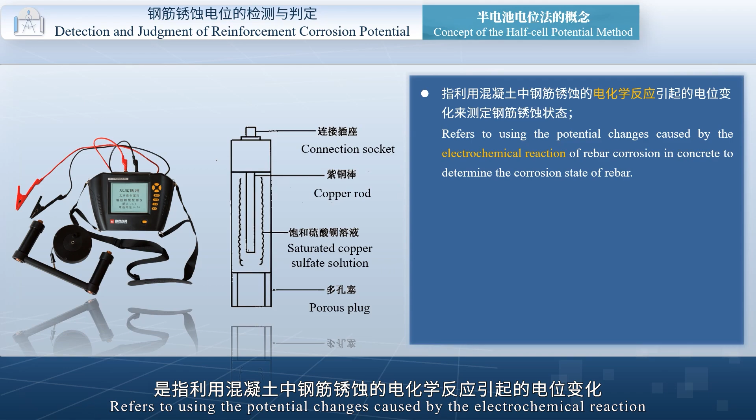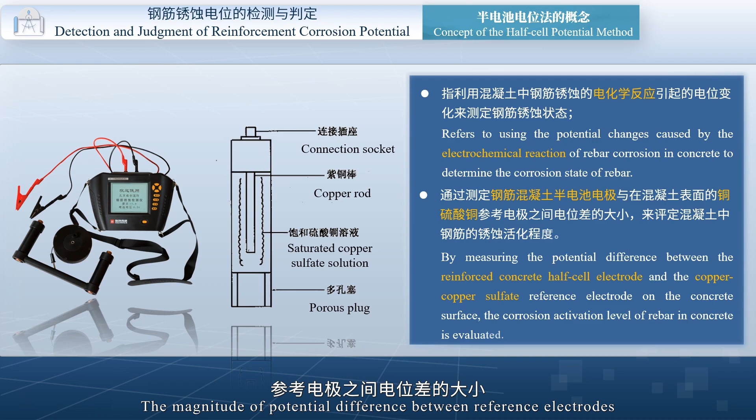The half-cell potential method refers to using the potential changes caused by the electrochemical reaction of rebar corrosion in concrete to measure the reinforcement corrosion state. By measuring the potential difference between the reinforced concrete half-cell electrode and the copper sulfate reference electrode on the concrete surface, we evaluate the corrosion activation degree of the reinforcement in concrete.

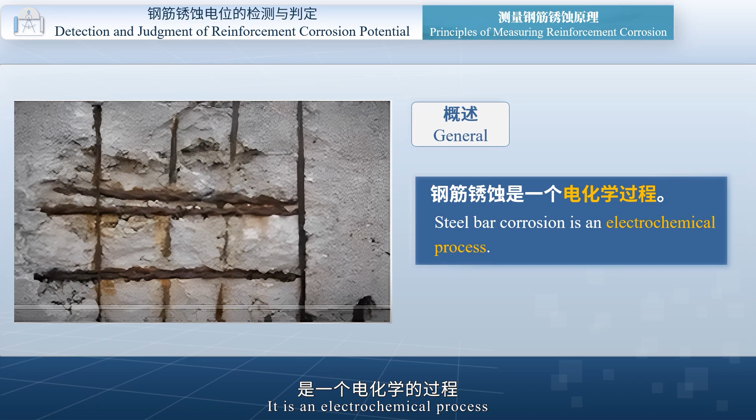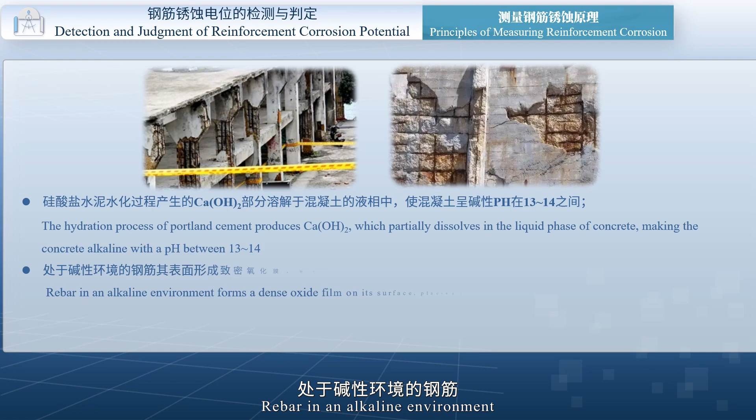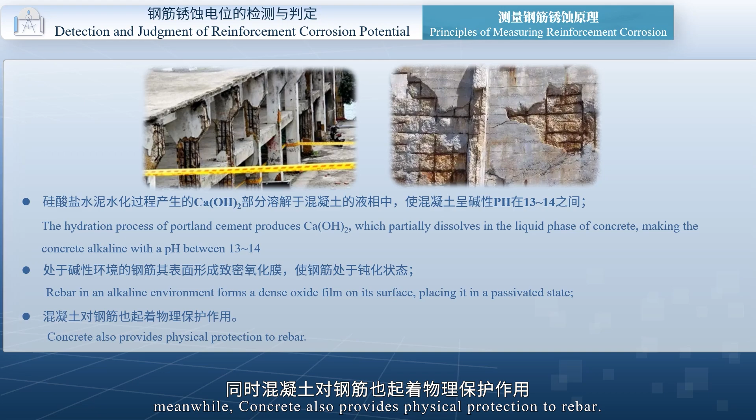Reinforcement corrosion is an electrochemical process. Produced during the hydration process of Portland cement, calcium hydroxide is partially dissolved in the liquid phase of concrete, making the concrete alkaline, with pH between 13 and 14. In an alkaline environment, a dense oxide film forms on the rebar surface and maintains the rebar in a passive state. Meanwhile, concrete also provides physical protection to rebar.

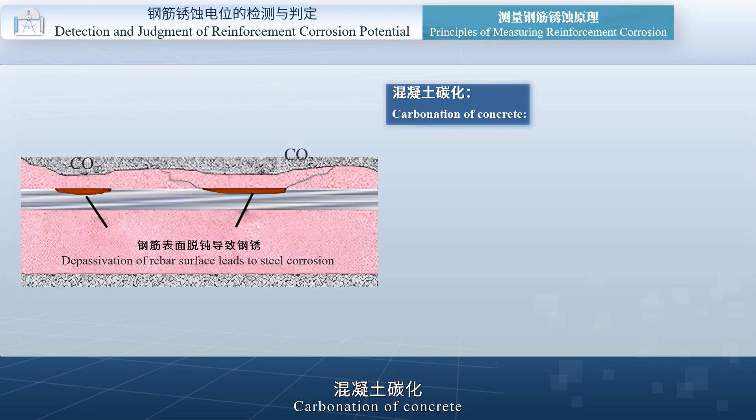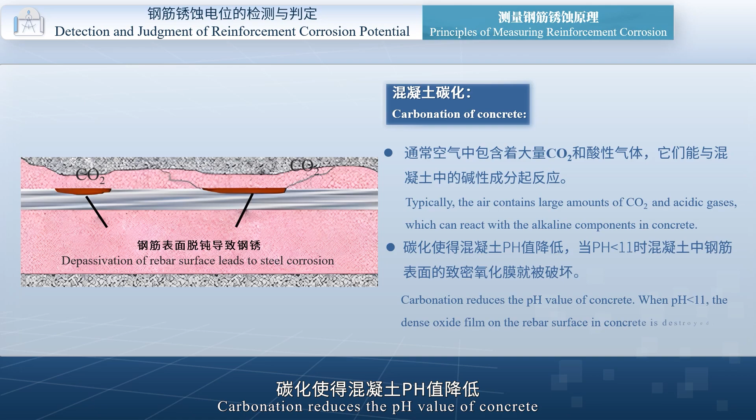Then, do you know what causes reinforcement corrosion? What are the main reasons? Carbonation of concrete: typically the air contains a large amount of carbon dioxide and acidic gases, which can react with the alkaline components in concrete. Carbonation reduces the pH value of concrete. When pH is less than 11, The dense oxide film is destroyed.

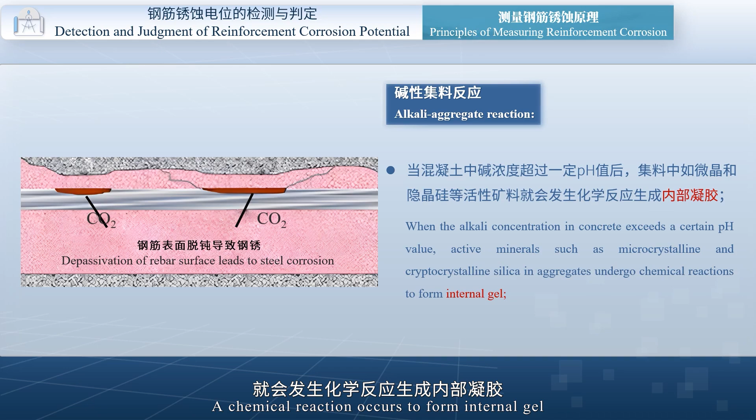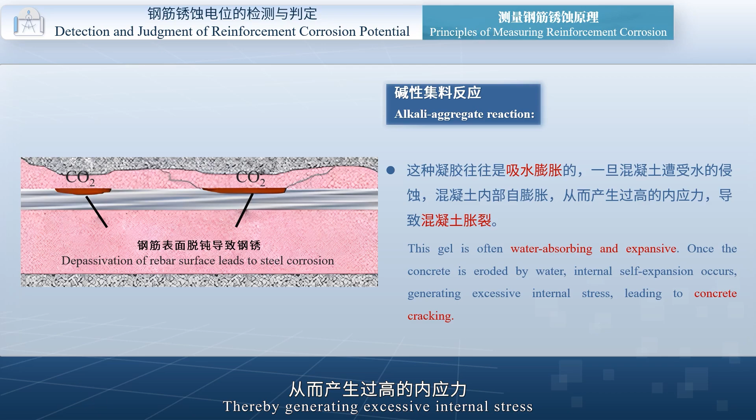Alkali aggregate reaction: when the alkali concentration in concrete exceeds a certain value, reactive minerals in aggregates such as microcrystalline and cryptocrystalline silica undergo a chemical reaction to form an internal gel, and this gel often absorbs water and expands. Once the concrete is eroded by water, internal self-expansion of concrete generates excessive internal stress, causing concrete expansion cracking.

Sulfate erosion damage: calcium sulfite and calcium sulfate will react with tricalcium aluminate in cement hydration products. The volume increases, thereby causing concrete to crack.

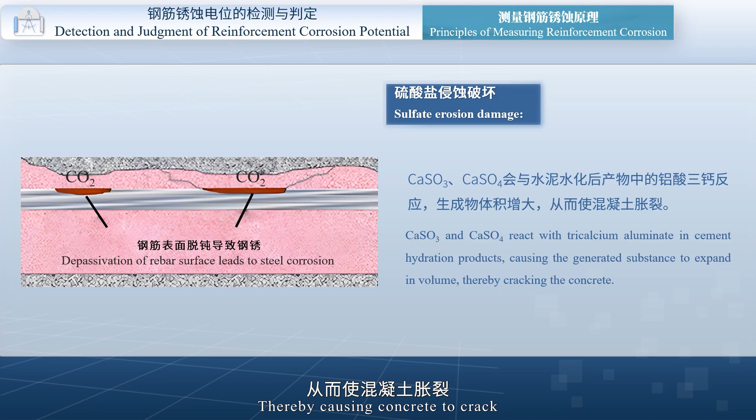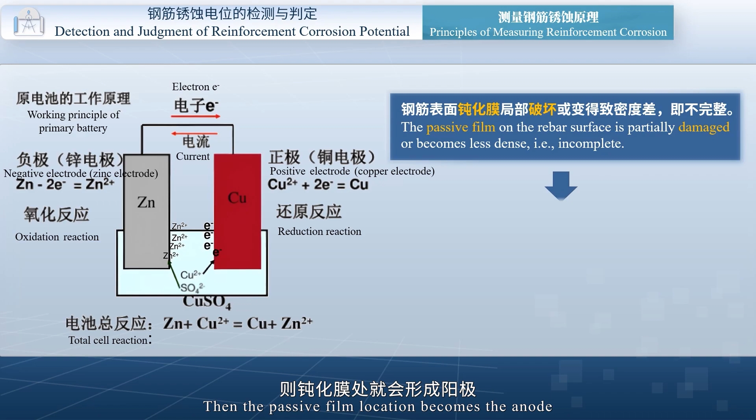Once localized damage occurs to the rebar's surface passive film, or it becomes poorly compacted or incomplete, that location becomes the anode, while locations where the surrounding passive film remains intact form the cathode, thereby forming several microcells. Although some microcells are in an inhibited state, they can be activated under certain conditions and undergo redox reactions. This leads to reinforcement corrosion.

Macroscopically, concrete and the embedded rebar form a half cell. It is precisely through inspection of the half-cell potential of reinforcement corrosion in an activated state that we determine the activation level of reinforcement corrosion in the current concrete.

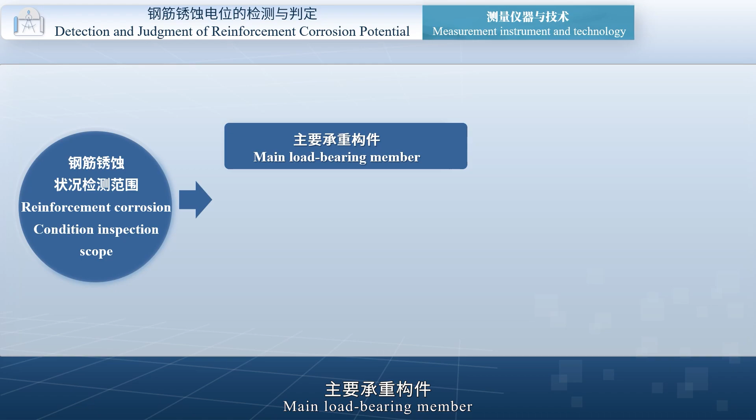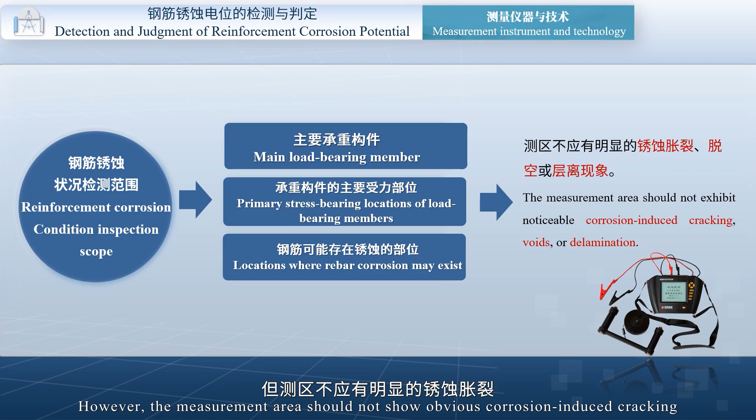The detection range for reinforcement corrosion condition should be main load-bearing members, primary stress-bearing locations of load-bearing members, or locations where rebar corrosion may exist. However, the measurement area should not show obvious corrosion-induced cracking, voids, or delamination. When arranging test grids on measurement areas, grid nodes serve as measuring points.

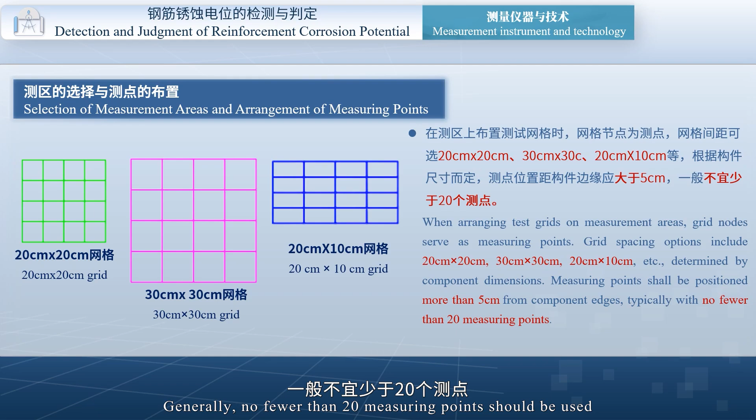Optional grid spacing: 20 cm x 20 cm, 30 cm x 30 cm, 20 cm x 10 cm, etc., determined based on component size. Measuring point locations shall be more than 5 cm from component edges. Generally, no fewer than 20 measuring points should be used. When readings from adjacent measuring points in a measurement area differ by more than 150 mV, the spacing between measuring points should generally be reduced. Measurement areas should be uniformly numbered, with the location indicated and surface conditions described.

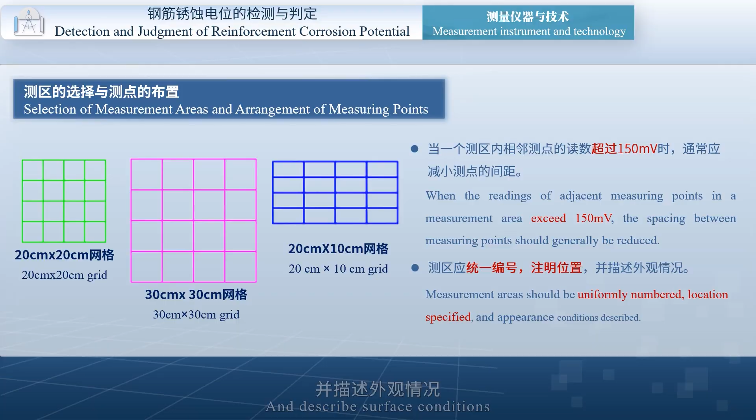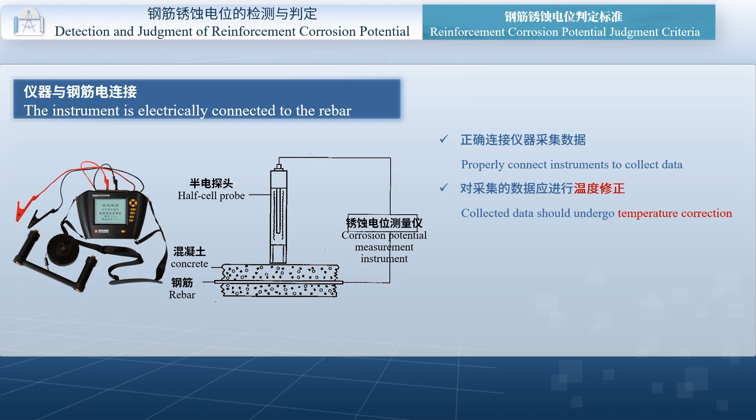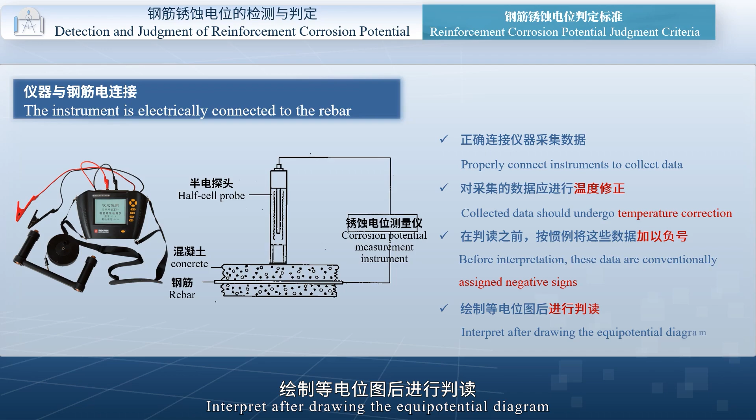For example, when the potential level is greater than or equal to -200 mV, we can determine the rebar condition as having no corrosion activity or uncertain corrosion activity. The evaluation scale is 1.

Through learning the key points in this task, you can indicate the influence of rebar corrosion on the durability and safety of structures, describe the electrochemical principle of rebar corrosion in concrete, and, by detecting the magnitude of reinforcement corrosion potential in concrete, make a preliminary judgment of rebar corrosion status.